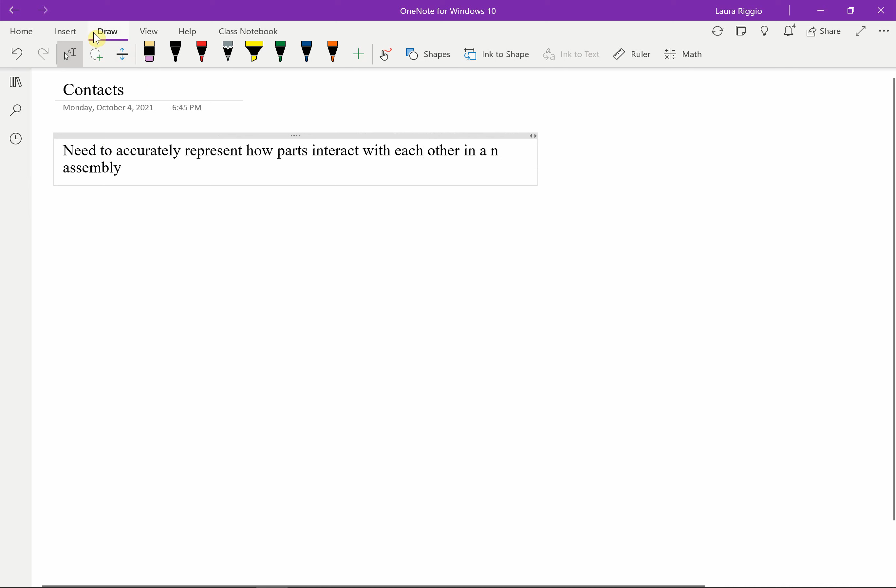In this lecture, we're going to go over contacts in SOLIDWORKS and how to define and describe them. Why do we care about contacts? We care about them because we need to accurately represent how parts interact with each other in an assembly. So basically everything that we've done up until this point has been on a single component. When you have assemblies of multiple components, we have to worry about how to treat the contacts between the two parts, and that's where contacts come in.

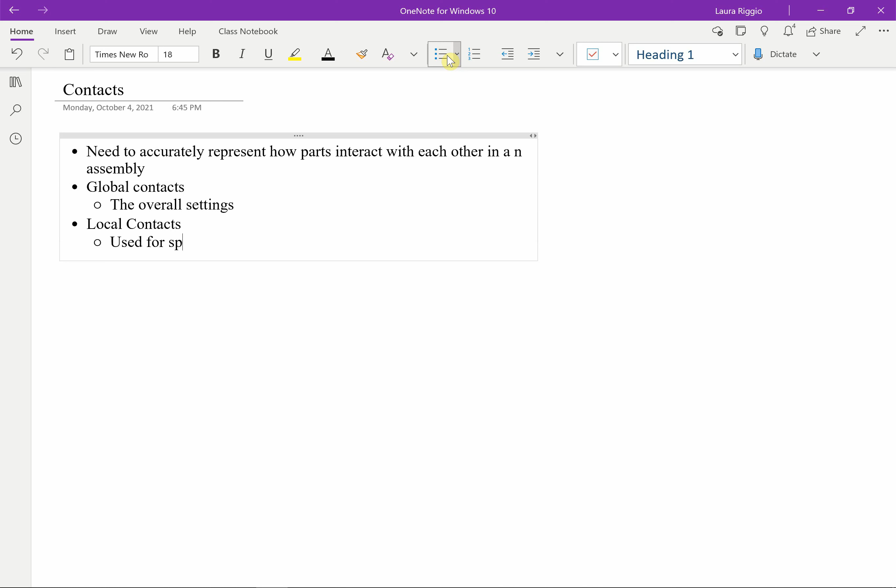So you have your global contacts, which are your overall settings, and then you have your local contacts, which are used for specific contact interactions.

There are 3 types, but we're really only going to deal with 2, and then we'll learn about a third one later. So the 3 types are bonded, no penetration, and allow penetration.

For bonded, if things are bonded, the surfaces act as if they are rigidly locked together, and you have a compatible mesh, and you merge your nodes.

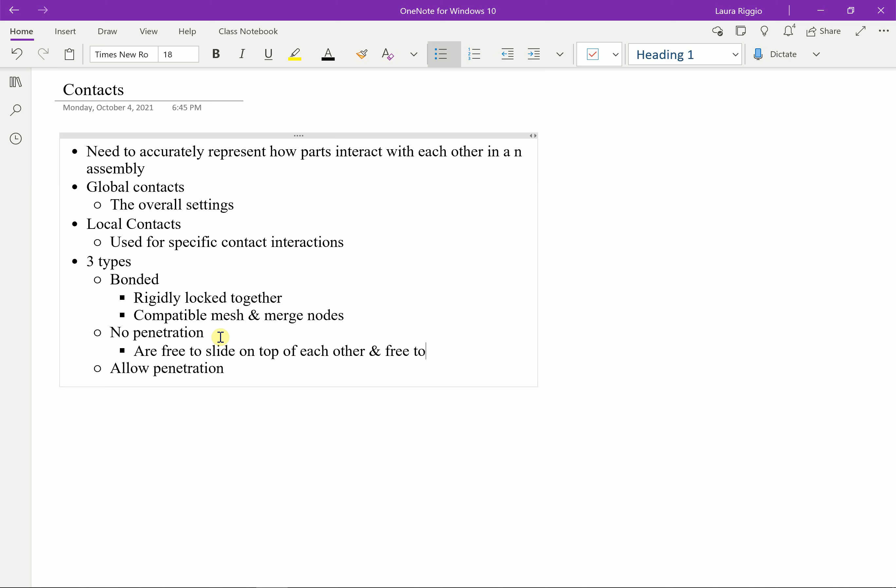For no penetration, what happens is your 2 faces are free to slide on top of each other, and they're free to separate. So bonded can't separate. They cannot go through each other, so you can't pass through each other.

There's also allow penetration. You have shrink fit, shrink fit for interfering components. We're gonna do shrink fit next week, actually. Maybe might be in a few weeks, but we're gonna do shrink fits.

One last thing to note is SOLIDWORKS sets your contacts based on surfaces that are touching, so small gaps can cause issues. So like when you're drawing your CAD model to allow for tolerances, if those 2 faces aren't touching, SOLIDWORKS isn't going to automatically find that as a contact, and then if a force is applied to one body, it's not going to transfer to the second body. So you really have to be careful when you model assemblies to make sure all of your contacts are accurately being portrayed.

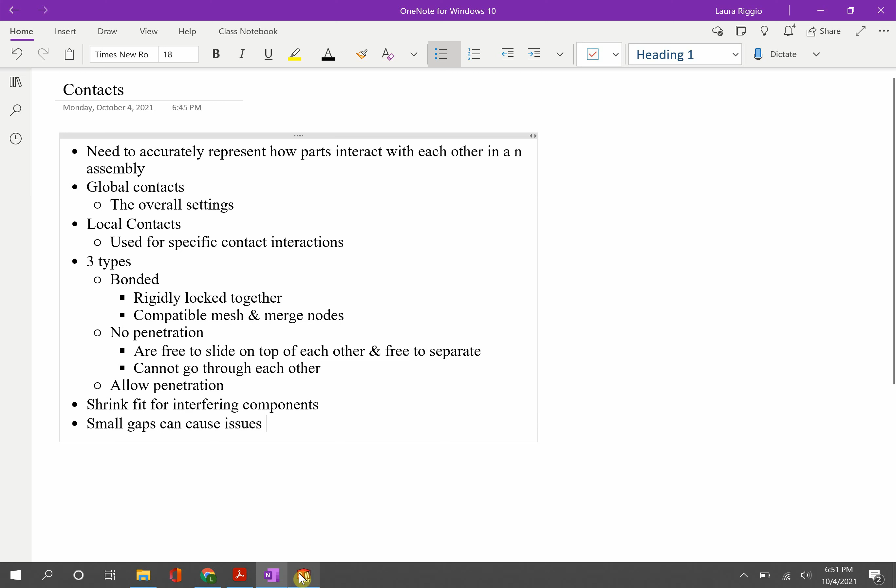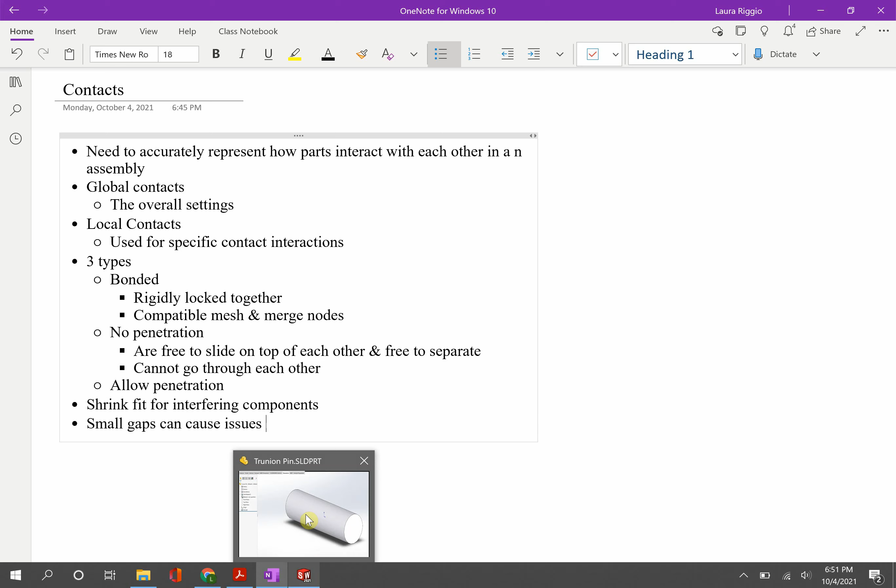So we're going to make an assembly today of a trunnion pin. That's a bracket with a pin in it. The first thing we're going to do is create some split lines on this part and then prep it for being modeled. A lot of the models we've worked with previously, this has been done already, but we're going to set this up.

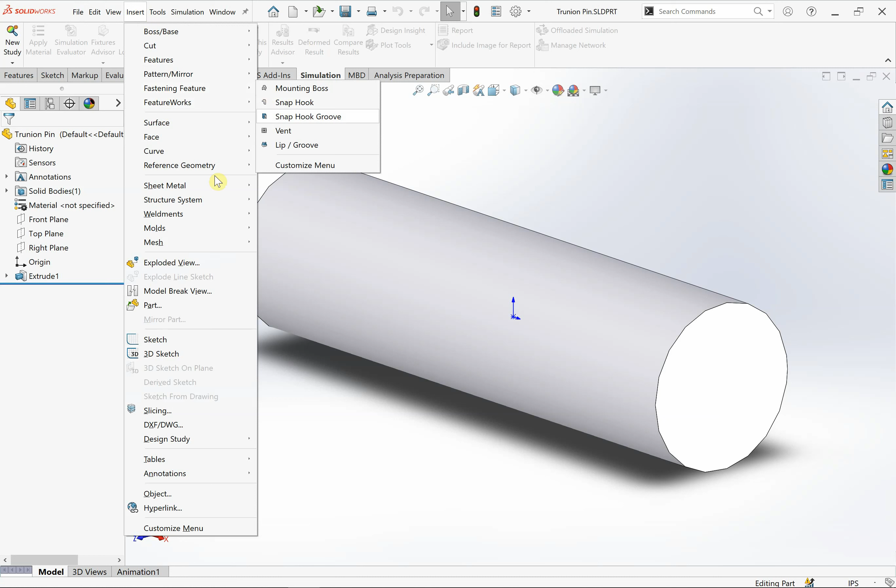So based on the part that we are looking at, I need to put 2 split lines in. So I'm going to insert some reference geometry, insert some planes. I'm going to use the right plane as my reference. I know that I need it to be 0.75 inches, and then conveniently we need a second one that is 0.75 inches from the first one. So I can increase my number of planes to 2, and that will create 2 equally spaced planes.

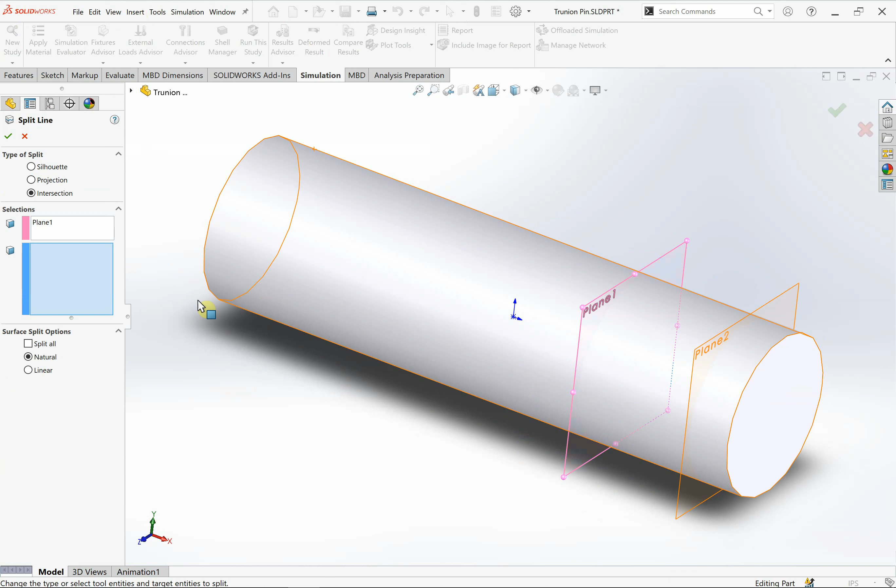So now I have these 2 planes roughly where I need them. I'm going to insert my curve for a split line, using the plane and the face, and I'm going to make it an intersection. Then I'm going to select both planes to do it at the same time. So what this does is it allows us to isolate this face that we're going to be using for mating and applying forces to, because we're going to apply the forces over here, not over here.

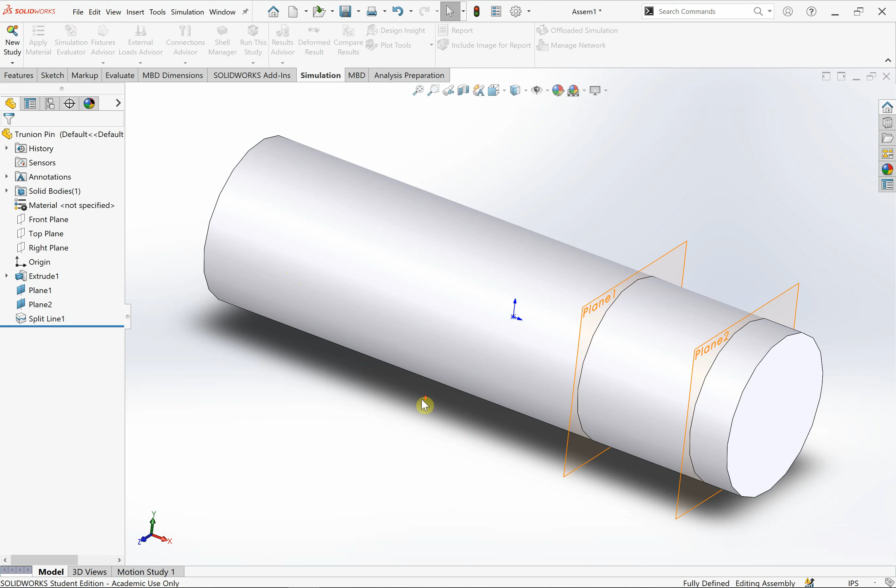So I'm going to save this, and then we're going to create an assembly. I'm going to create an assembly from part, using this part as the basis of my assembly. There it goes. So over here, SOLIDWORKS is going to show you any parts that you have open, so I can just plop it in.

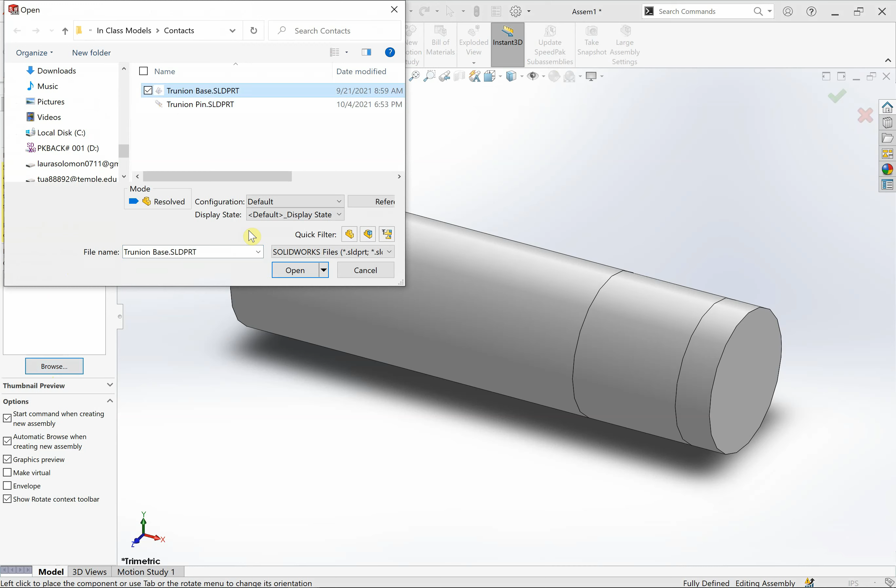Then I'm going to insert a component. I want to use an existing part or assembly, and this is only going to show me the parts that I have open, so I'm going to browse and find the base. I'm going to open the base and plop it over here. So you notice I can move this base around. I can't move this pin around because the first object you put into an assembly becomes fixed.

So we're going to put some mates in. We're going to make a concentric mate between the cylindrical faces. You can use any cylindrical face, so you can click up here for mate.

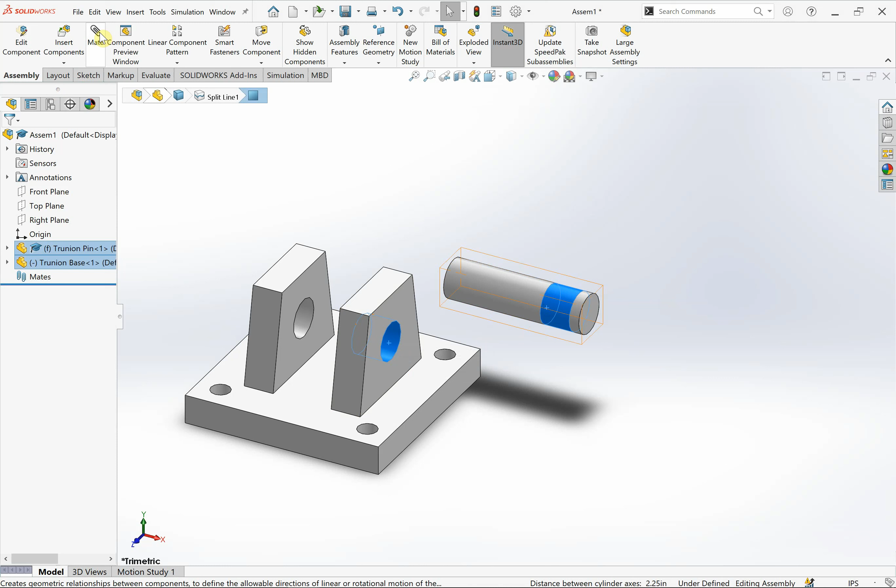SOLIDWORKS likes to guess which kind of mate you wanted. Since I selected two circular faces, it wants to make a concentric mate, which is what I want. So now this base can slide along the pin. It can rotate, but it has to remain concentric with the pin.

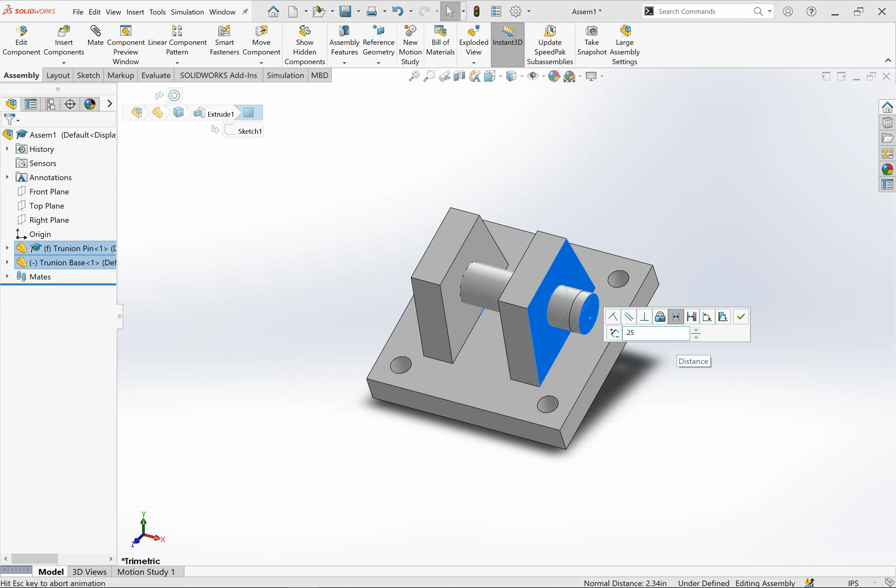The next thing I want to do is use this right face and this end face, and this is where some mates pop up. I want to use a distance mate, and that distance is 0.25 inches. I need a 0.25 inch gap on my base. And now see that the base can rotate around this pin because the pin was the first component added to this.

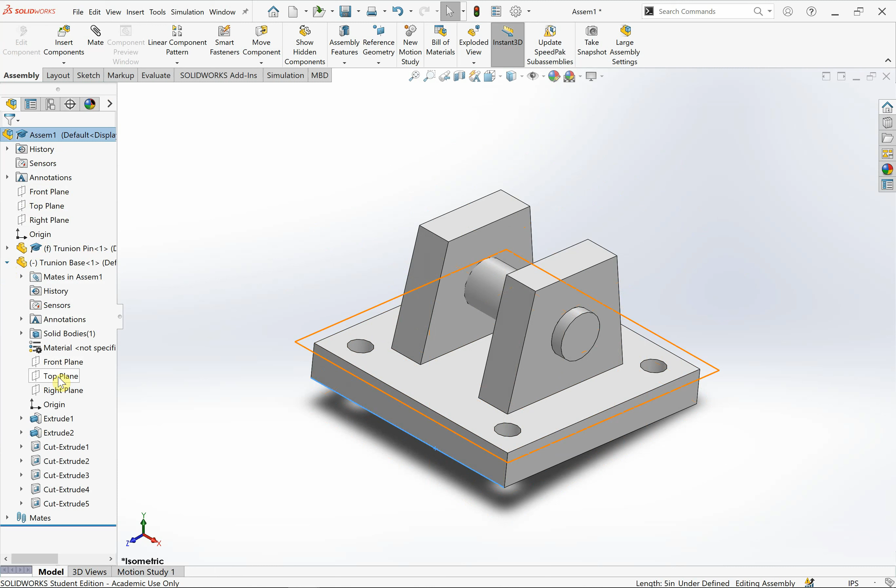So I'm going to add one more. Since our assembly has a front, top, and right plane, each part also has a front, top, and right plane. So I'm actually going to make the two top planes parallel, and that'll just make sure everything lines up nicely.

I'm also going to use this front plane, so I'm going to rotate the view for the front plane. And on the front plane of the assembly, which is up here, not the front plane of the parts, I am going to make a sketch.

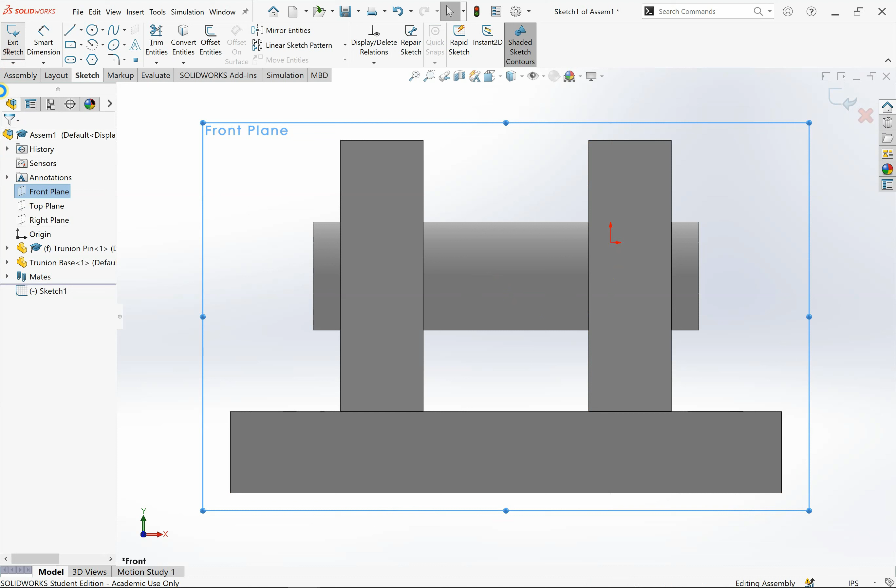And I'm going to draw a line. And you need to be very careful. Hold on, I want to exit the sketch. I want to do one more thing. So if here's my origin, just over here randomly.

I'm actually going to float my pin, so now I can just move everything. I'm going to take the origin of the pin and the origin of my assembly and make them coincident to line up the planes and to line up our components in our assembly.

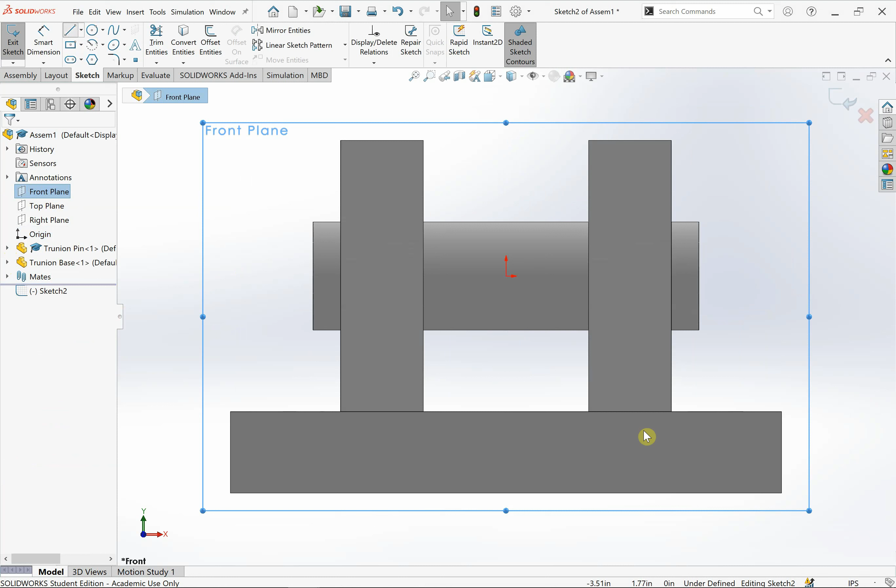Now I'm going to put a sketch on the assembly, and I want to draw a line, and I want to use the origin of the part to draw a vertical line. That's all I'm going to do is draw a vertical line.

Because I want to use this vertical line to make an extruded cut.

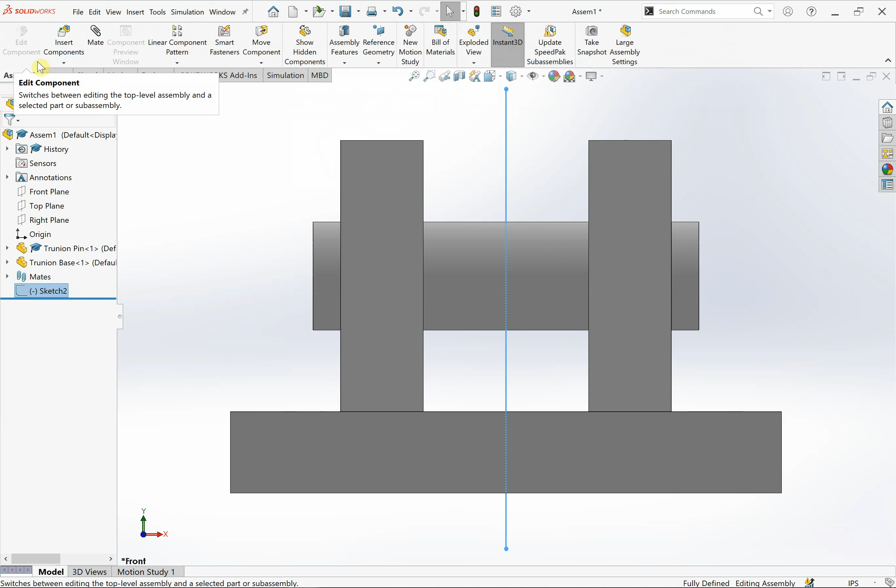Which is going to be under assembly features. We are going to make an extruded cut. You can see it's showing different arrows that we can use from the extruded cut. We're going to go from this sketch plane, through all. You're going to see this plane shows up, so we can go in different directions.

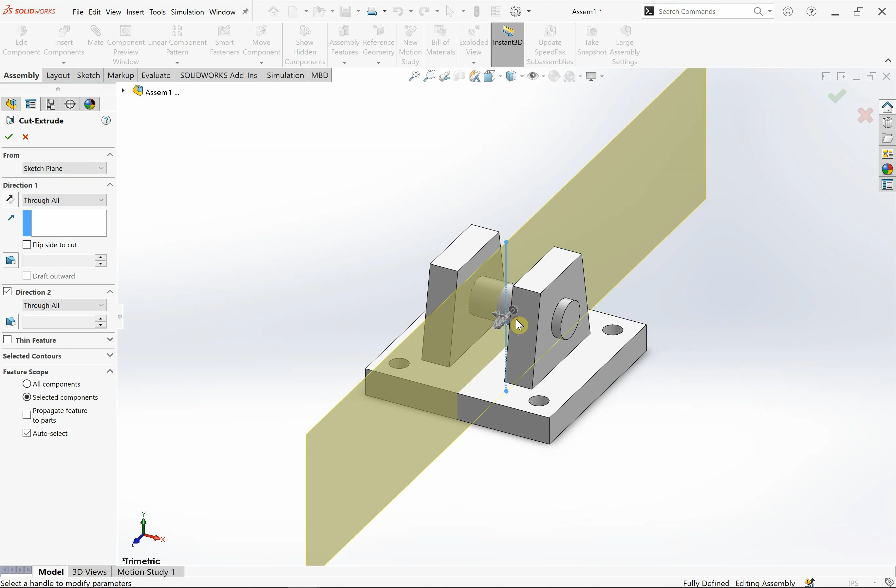Now, we put the split line on the right half, so we want to make sure the left half disappears. We want to make sure that arrow is pointing the way we need it to disappear. And we're going to just select our through all option.

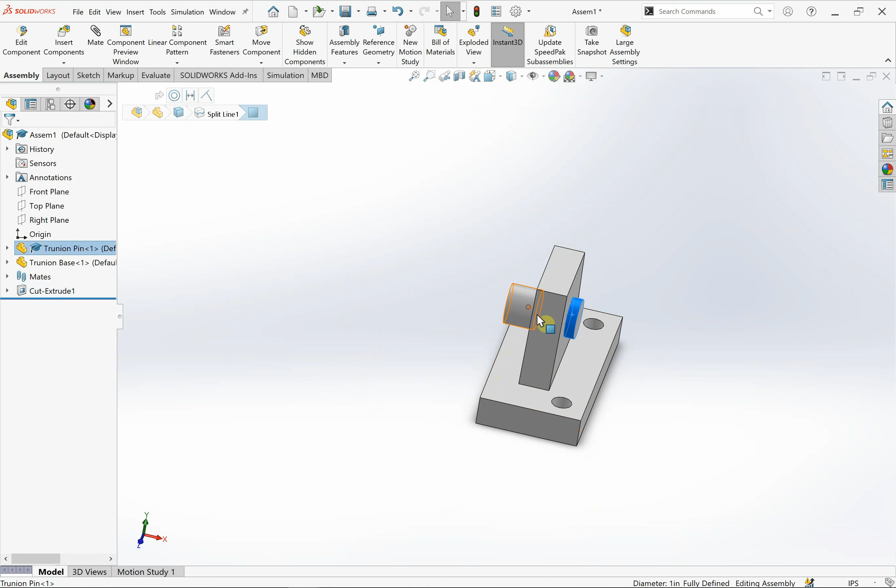And we'll cut away half of our model. Let me make sure we cut away the right half. If I have a separate face on the outside and on the inside of our cut model.

So we're using symmetry to reduce the overall size of our model so we can make it run faster, because anytime you have contacts, your models are going to take longer to run because it has to calculate what's going on here. So I'm actually going to save this, just so nothing bad happens.

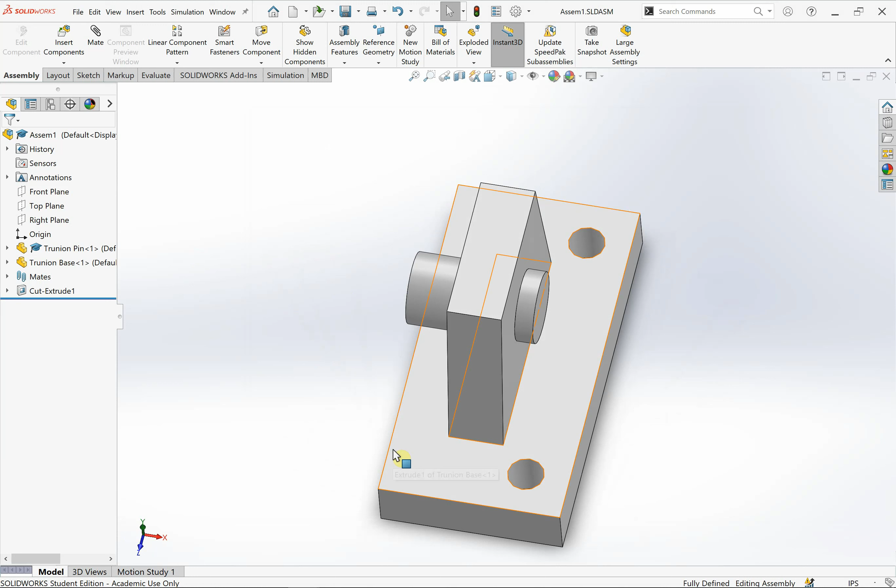So now we've done all of this work to get our model ready for the actual simulation that we are going to run. So now I'm going to go to simulation. I'm going to make my new study. We're still doing static studies.

And now I'm ready to work my way down my feature tree. I'm going to right click on parts and apply a material to all. The material I'm going to apply is cast alloy steel. So now my parts have been defined.

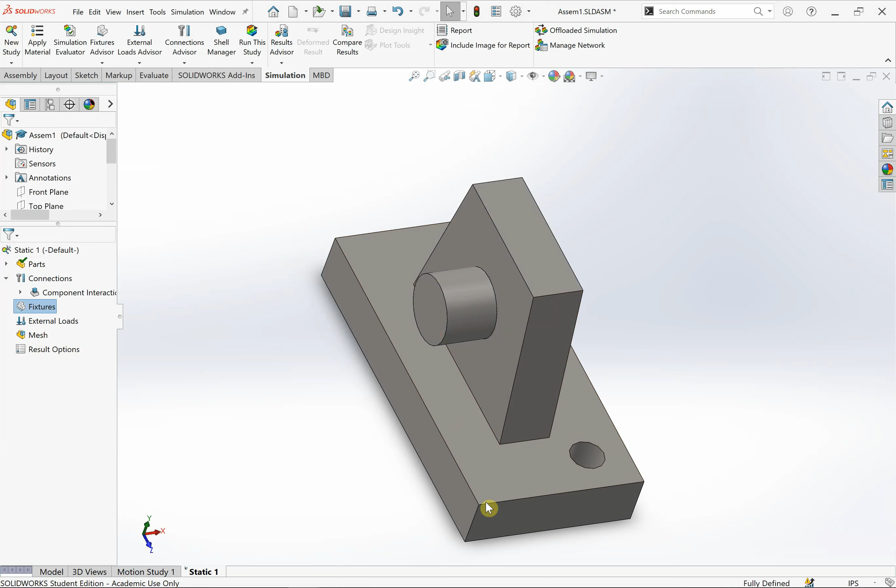I am going to put a fixed geometry on the inside face of our bolt holes.

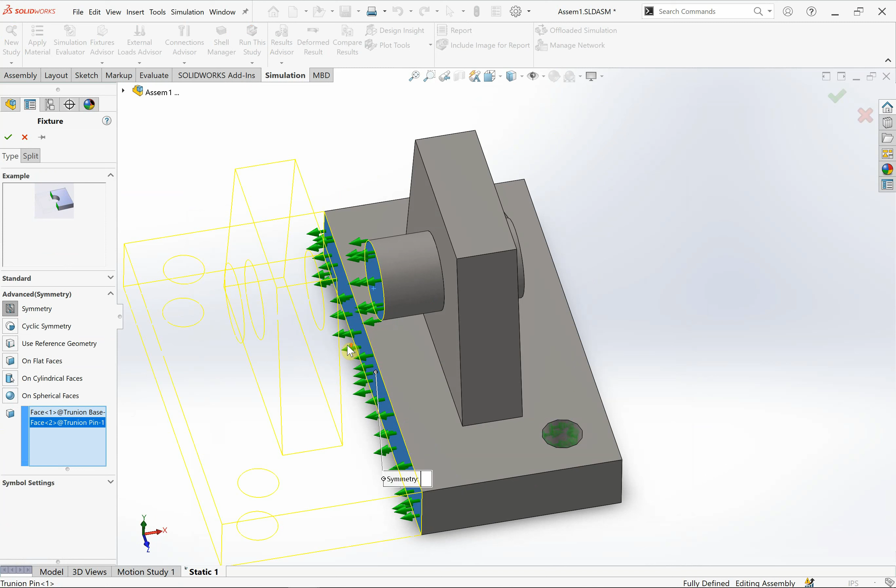And then I'm actually going to use an advanced fixture called symmetry on all of the cut faces, and as you can see, it's making a projected part show up in yellow. So now we have symmetry, and we have fixtures, and notice the symmetry is showing translation arrows normal to the plane, because if there was a part there, that side can't move normal to the plane.

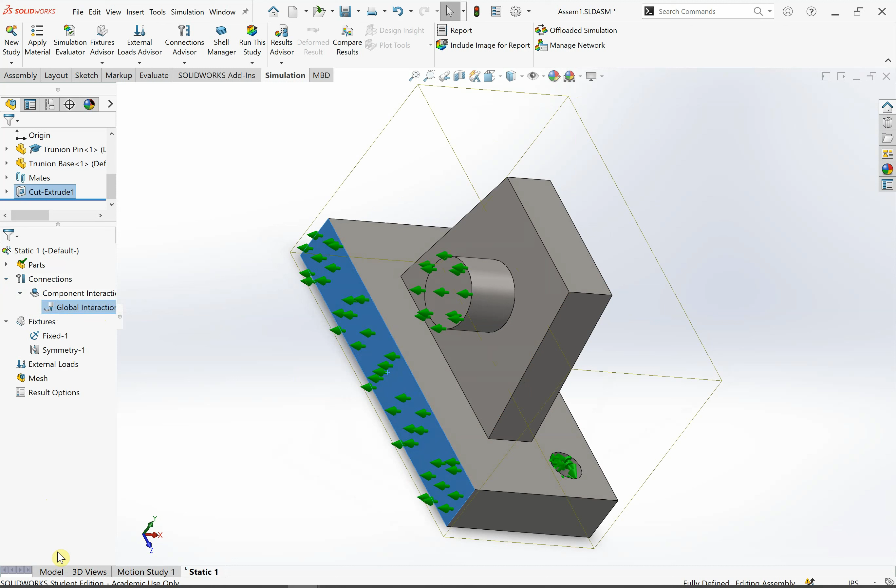Next we're going to do the contact. If you expand these contacts here, we have a global bonded contact. What we're going to do is put a local contact which will override the global contact between this pin and this base. The easiest way to do that is if we go back to our 3D model and click on...

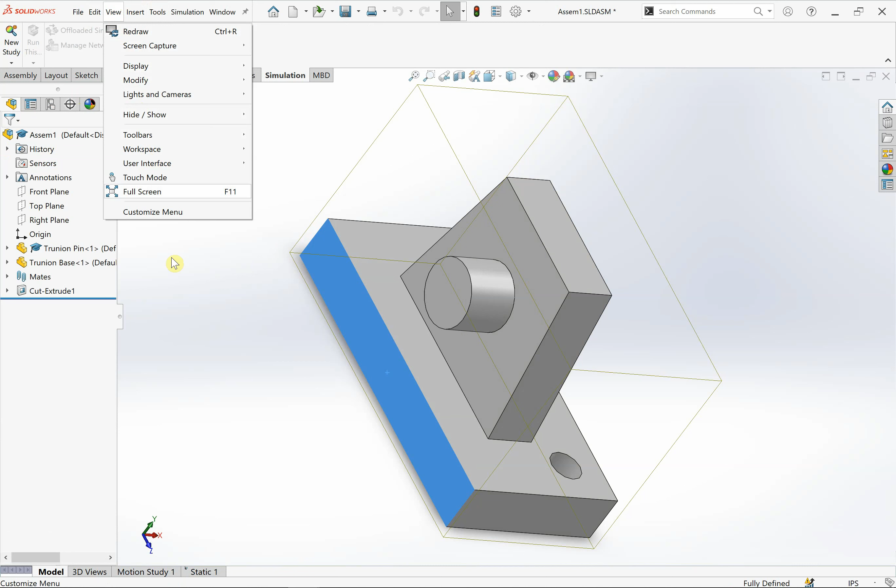Configurations, not configurations. I'm going to click on view. Oh, I forget how to make an exploded view. I'm gonna click on exploded view. There it is, thank you.

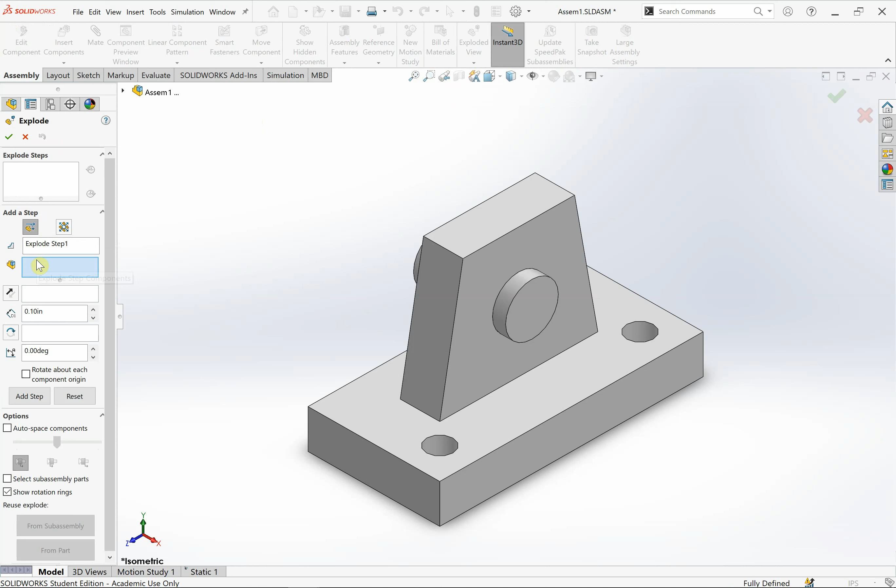We're gonna do a regular step for our components. We're just gonna push the pin that way. So now we have an exploded view.

I'm going to go back to my static study. I'm going to right click on connections, and I am going to create a local interaction. Instead of manually detecting it, I'm going to set it to contact. Contact is going to make a no penetration type boundary between them.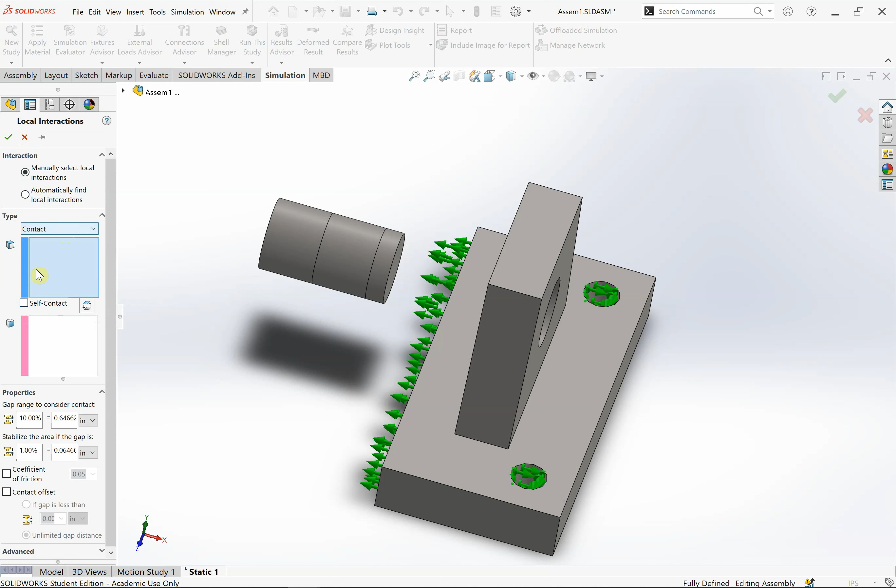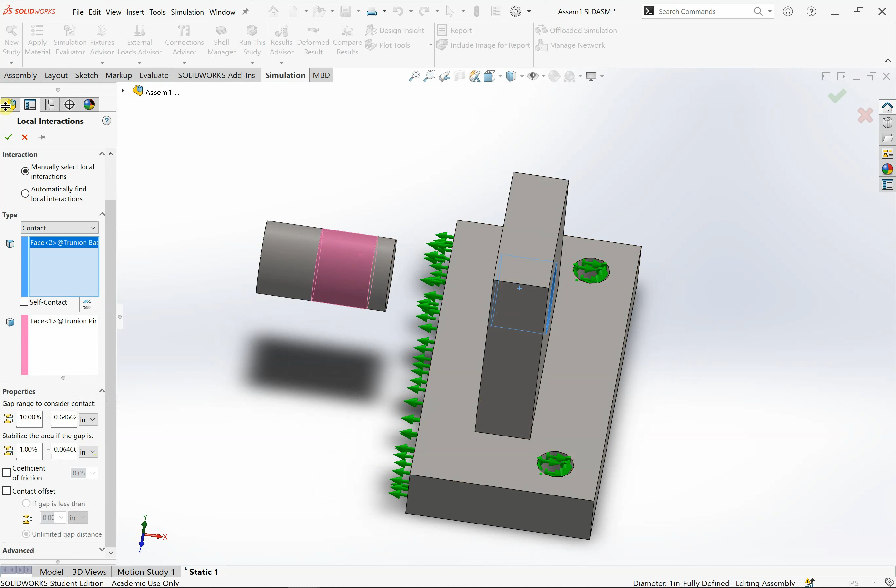The first surface I want to choose is the inside face there first. The second face will be the face on the pin. I'm going to click my check mark. So now here we have our global that's bonded, and we have our local that's overriding it.

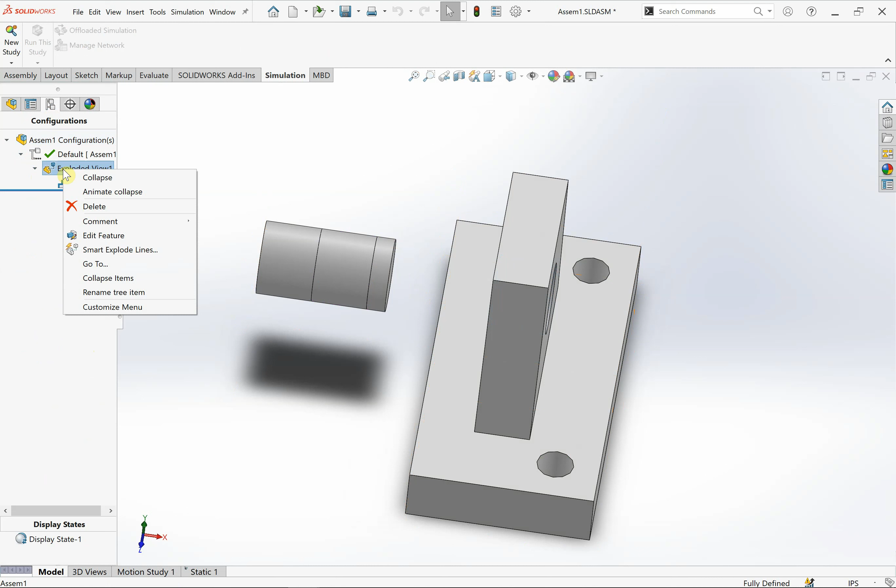I'm going to go back to my feature tree, and I am going to collapse my exploded view and go back to my simulation. We have our symmetry, we have our fixtures. We're going to put our load on.

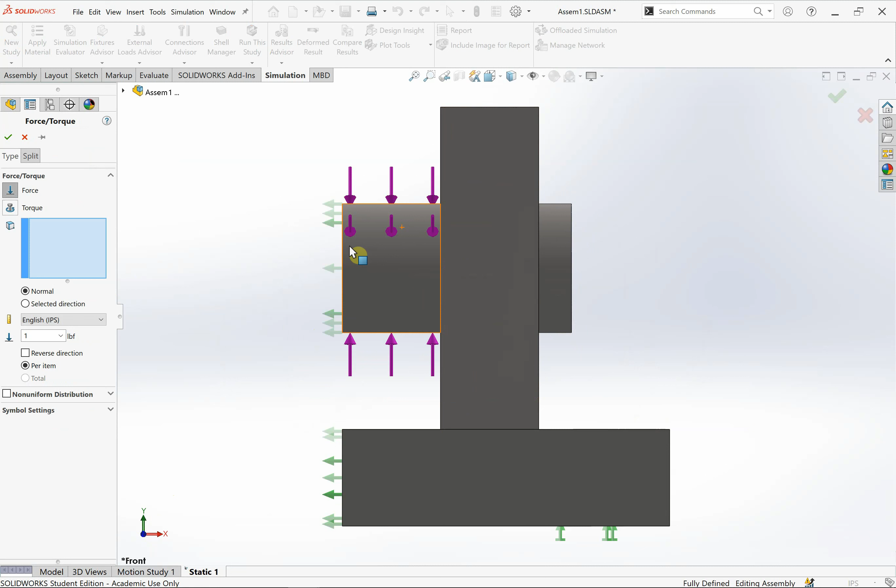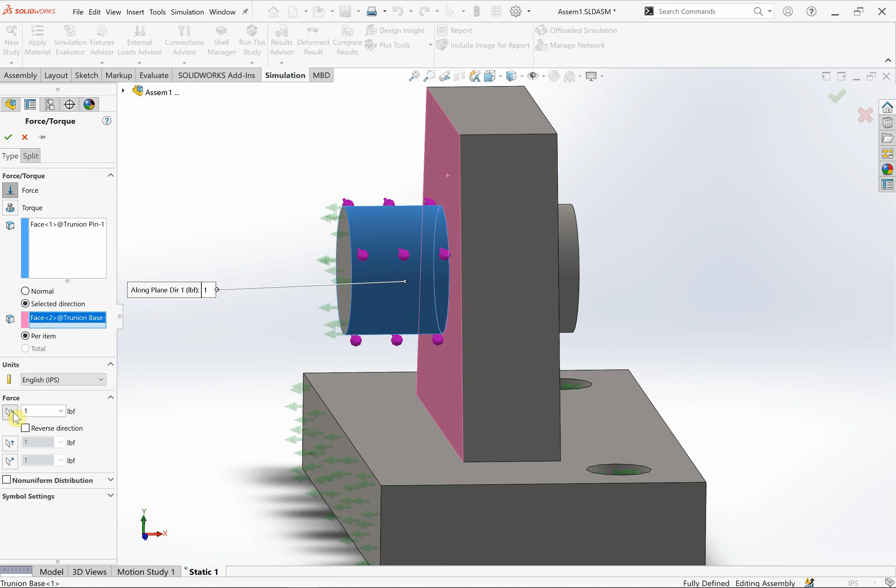So this pin experienced a force that, if we're looking at this, goes at a 60-degree angle like this. So we are going to put a force on the circular pin surface, but we don't want it to be normal. We're going to select a direction, and we're going to use any flat face. I'm going to use this inside face, and we need to note our directions here. We want a horizontal going this way and a vertical going that way.

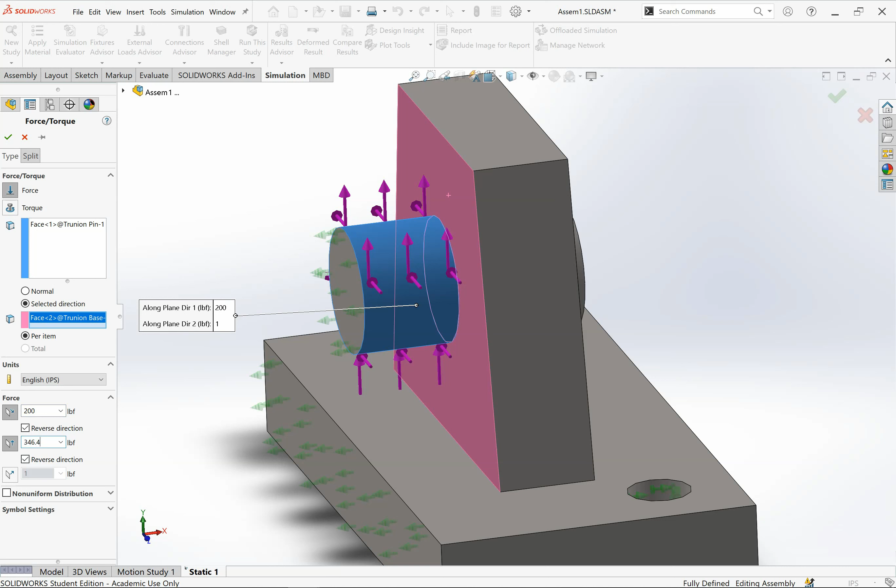And these values are 200 and 346.4. So this was subject to an 800-pound load, but since we're only looking at half the model, we're going to use a 400-pound load, which I broke down into its two components. So now we have our vertical and horizontal components. It's important that the normal component—anything normal to this face—is not a force that we want. And remember, these directions are in reference to this face that I chose.

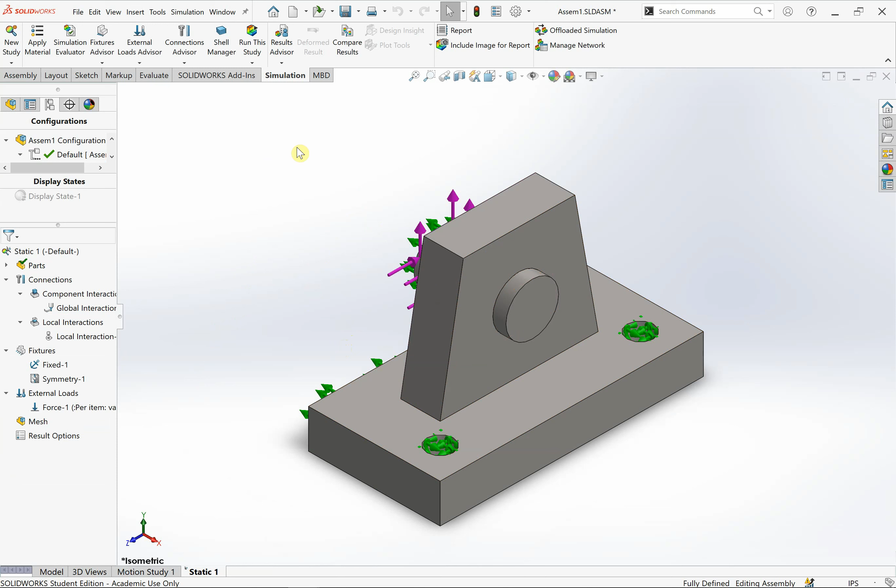So now that we have our fixtures and our loads, we're going to run a standard mesh. It's going to take a little bit of time because it's got to resolve the contacts. You can't mesh it until after you've made your contacts. And you see here it's establishing this matrix, and then it iterated on it. And now it's solving the contact constraints. This is where it's going to spend a lot of time, because where bonded merges the nodes in contacting areas, no penetration doesn't. So it takes a lot of computational power and effort to solve these contact regions. The more you have, the longer things are going to take.

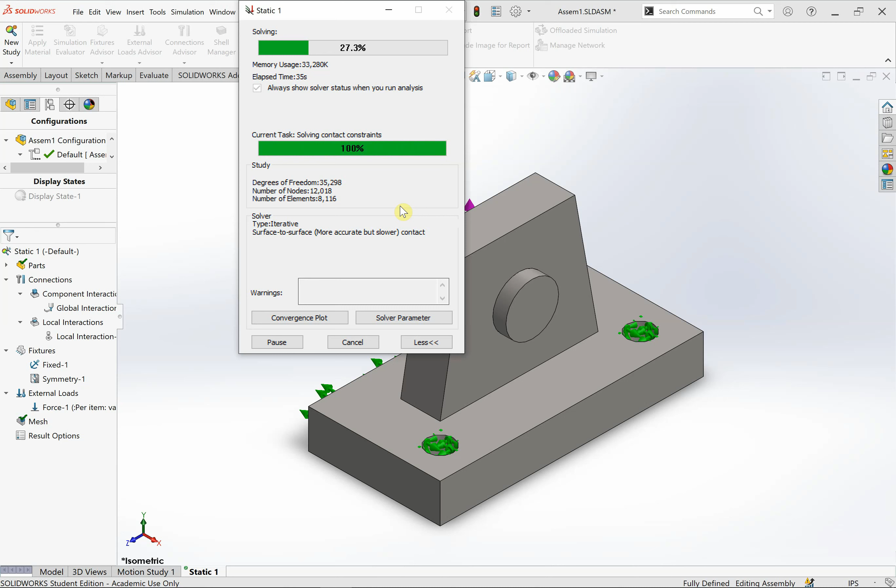And it pops out our results. We have our von Mises plot.

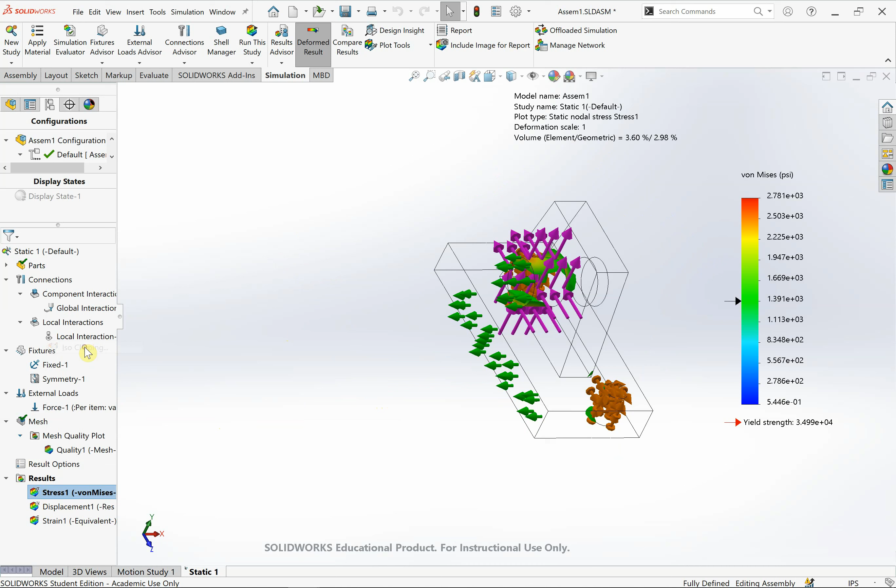Before we look at a graph of contact pressure, we're going to look at the von Mises plot a little bit more. I'll show you how to edit some views on it. If I right click on my von Mises plot, I can make what's called an ISO clipping. First I'm going to hide the forces and fixtures because there's junk in my graph. I can use an ISO clipping.

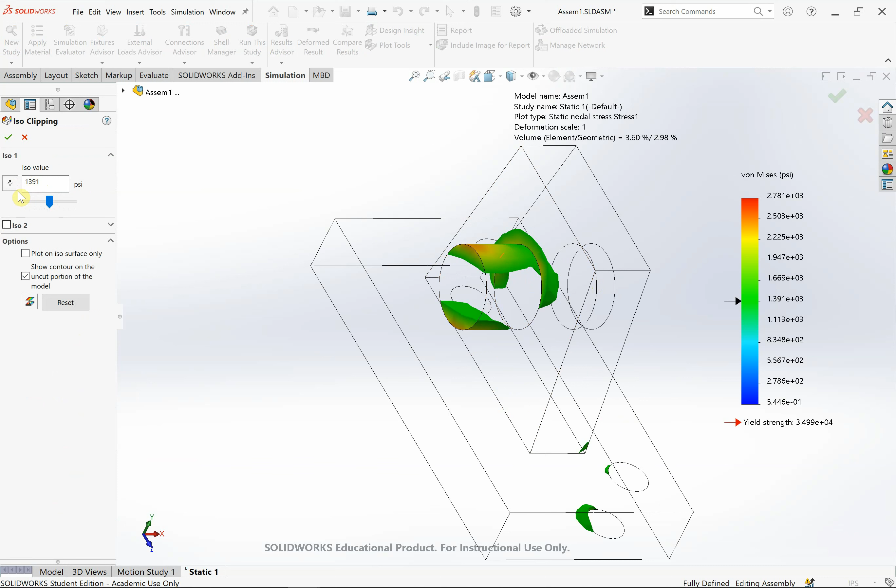What an ISO clipping does is only show you values in a certain range. So if you notice here, it's now showing values that are 1391. If I slide it to the left, lower stresses come in. If I slide it to the right, it's only going to show me higher stresses. You can flip this arrow so it works the other way, only showing you things lower than it.

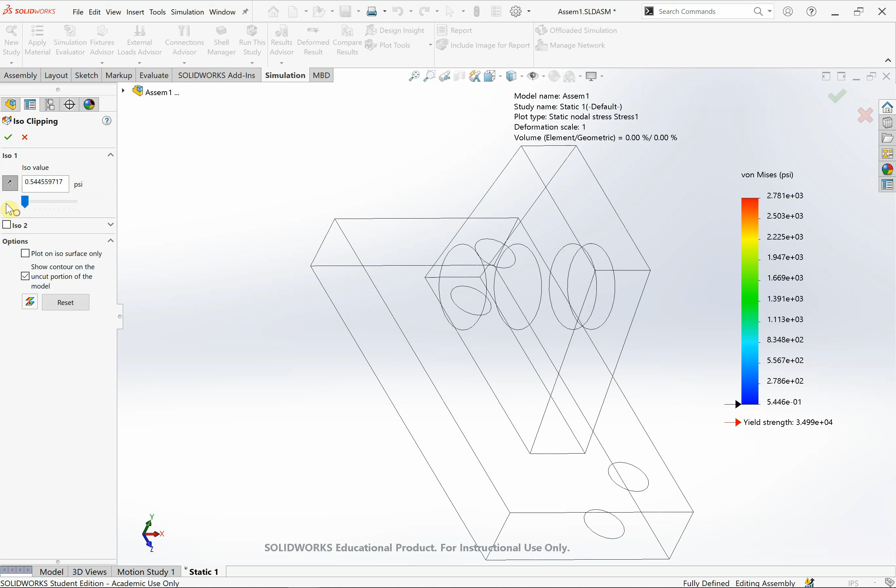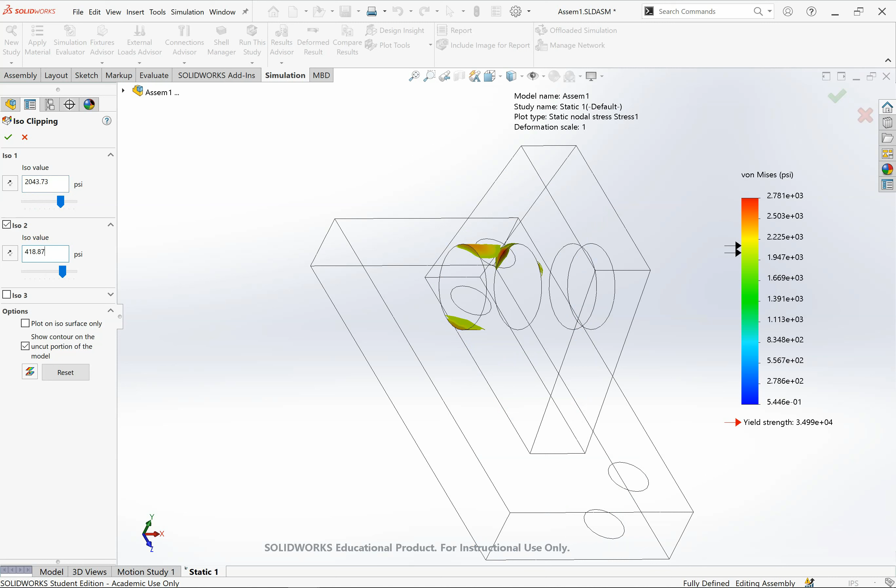We can put two on, so I can show you values between this and this. If I set this first number to, let's say, 2043.73, and I set the second number to 418.87, it's going to show you values between those. So it's really good for finding stress equal to a certain value, where the arrows will show you what you're looking at.

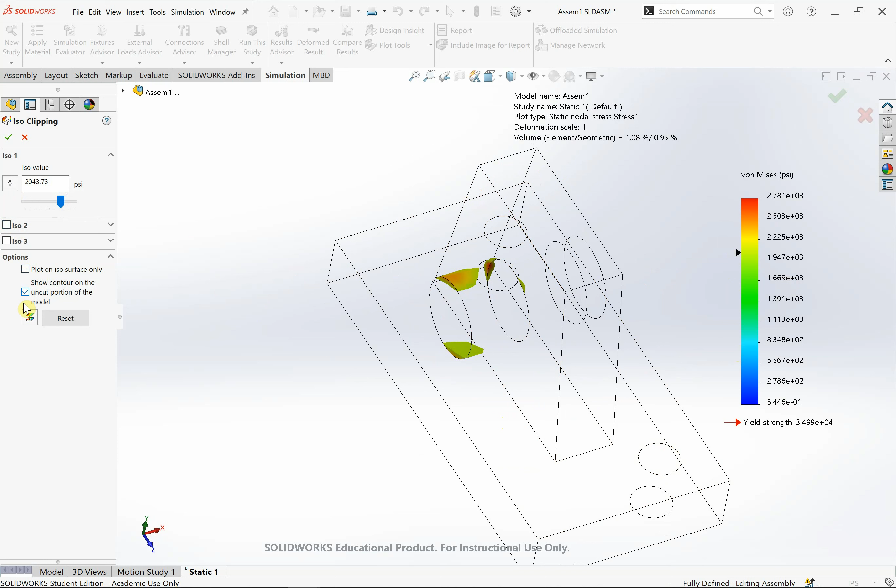So this is showing me values above 2043.73. If I say plot on isosurface only, you're going to only get that value. You're not going to get anything higher. I'm going to turn off the ISO clipping so it doesn't mess anything up.

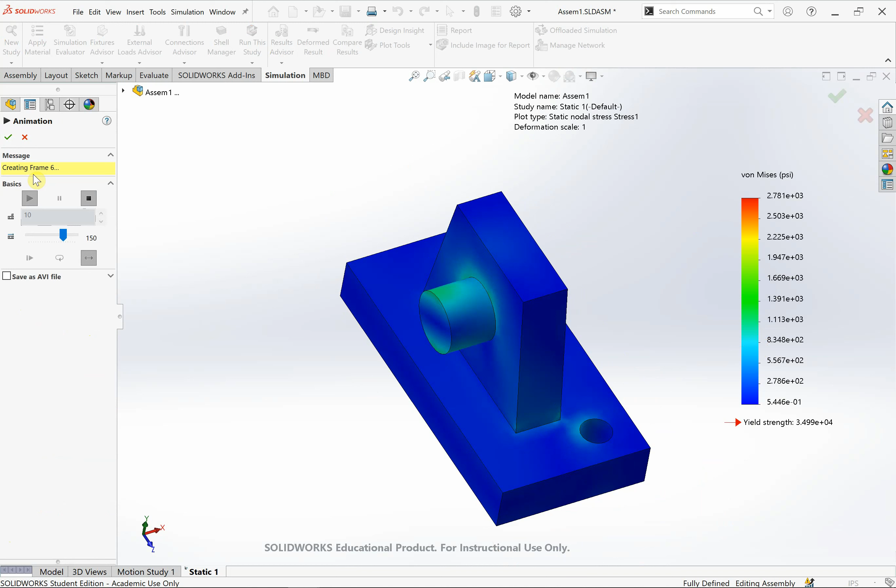As a reminder, we can animate our stress by right-clicking and hitting animate. We can change the number of frames, say 10, and then run it again. The more frames, the smoother a picture you'll get. Just fun things that happen. You can do the same kind of things with ISO clippings and animation to the displacement and strain plots.

We're going to create a new plot in this case to see what's going on with our contact. I'm going to create a new stress plot, and we're going to make a plot of contact pressure. Notice this only shows up because we have contacts occurring. We're going to show it as a vector plot.

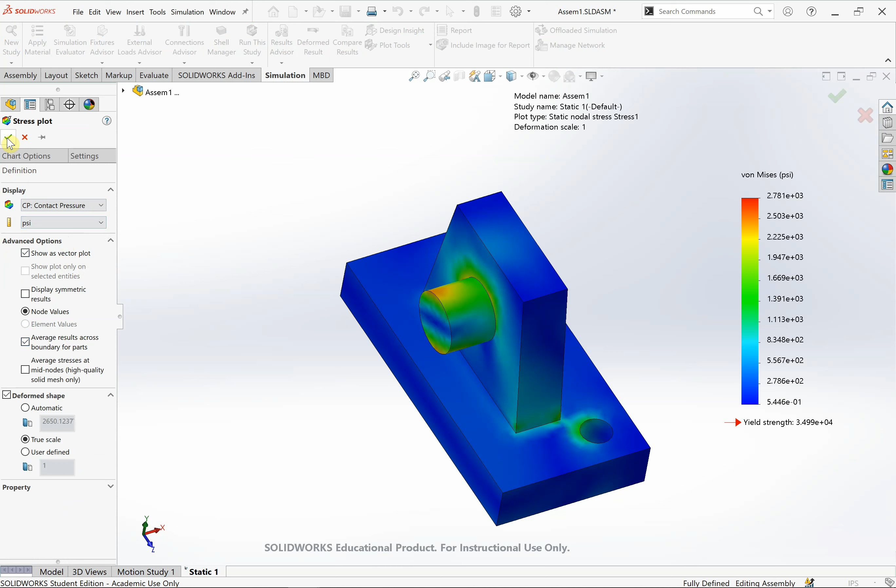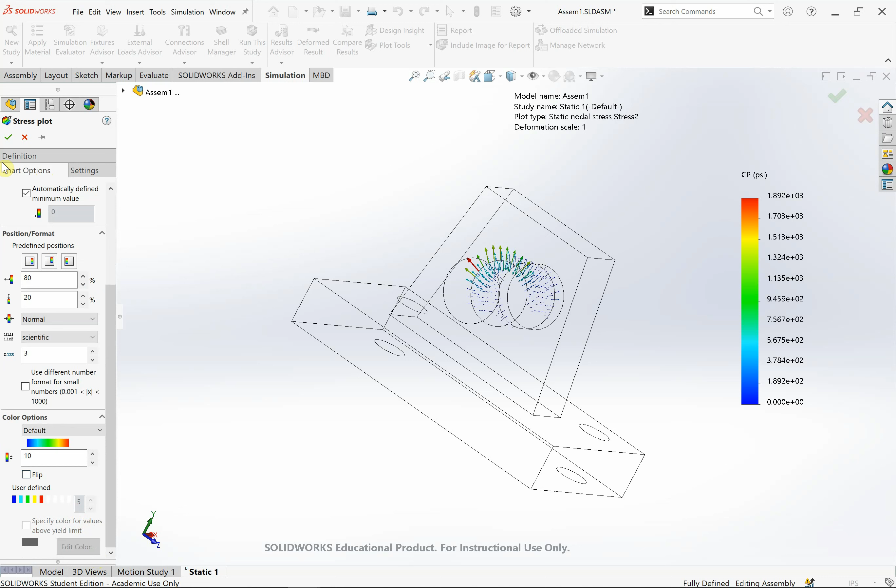We're going to look at it, and you're going to see these arrows show up. So we're going to actually edit its definition, find its symbol size, definition, show as vector plot. I can't find the setting right now of how to make the symbols larger.

What's unique about a contact pressure plot is it's showing us the magnitude and direction of our contact pressure. You can see it's higher where we applied our forces and our load, and it's lower where it's not.

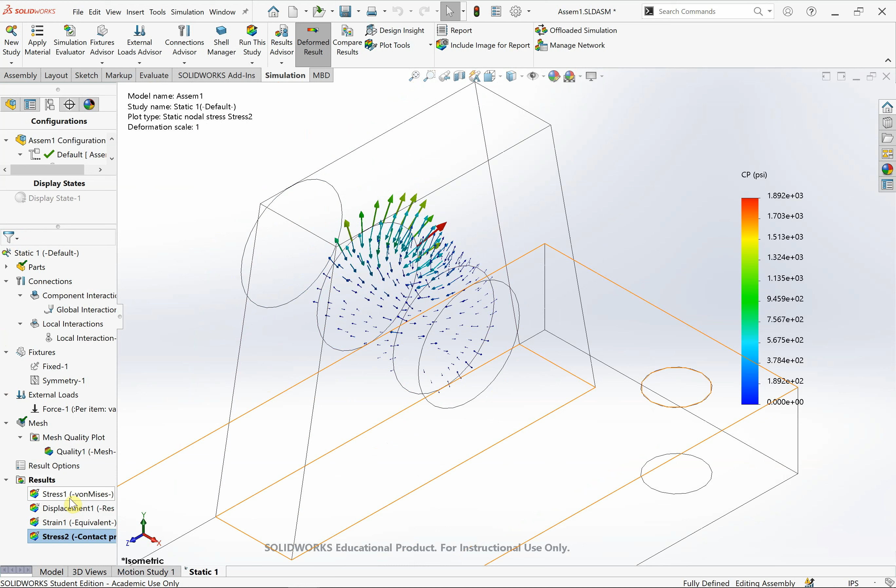That's how you can look at some of your contact stresses. We're actually not going to go into verification with this. If we also look back at our von Mises plot...

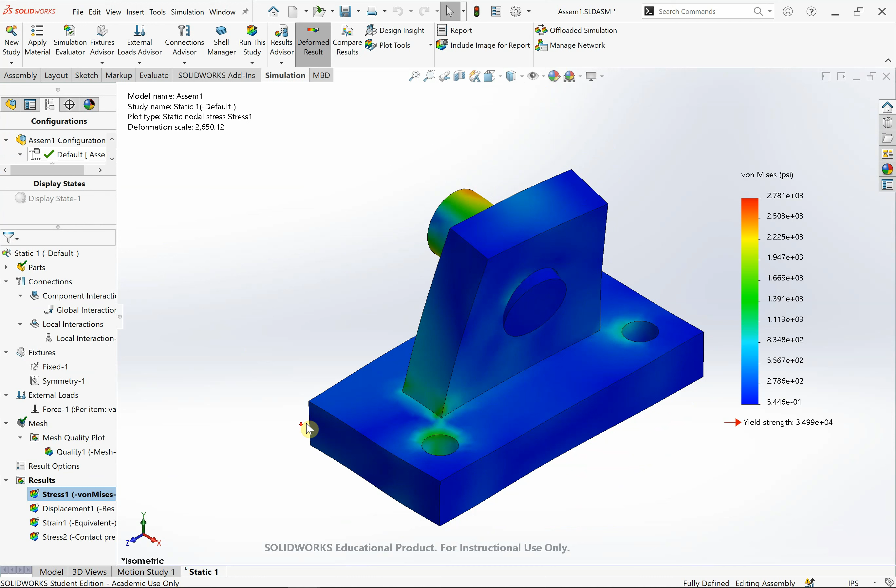I'm going to pose the question to you—I'll get a good view of it, this will work—of whether or not you think the way that this part is deforming, as I animate these, is an accurate representation. So you can pick your brain on that.

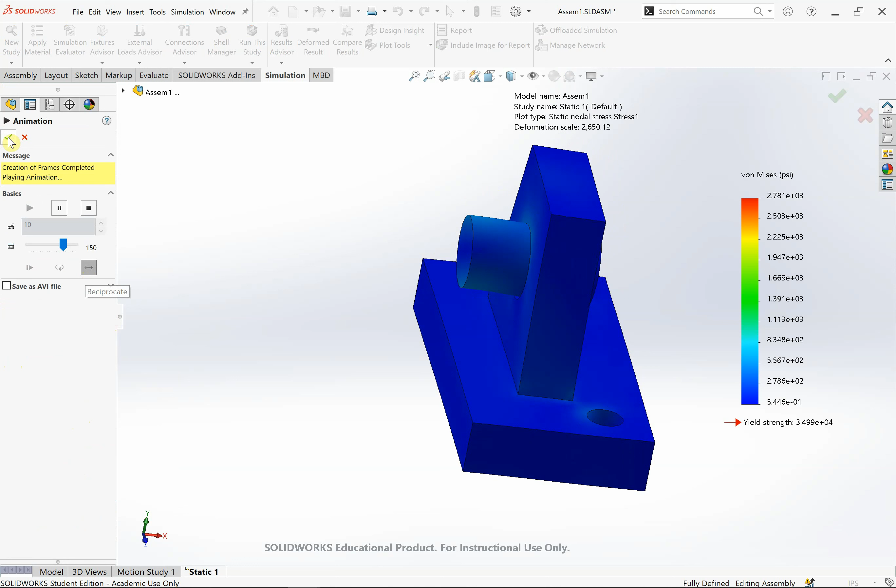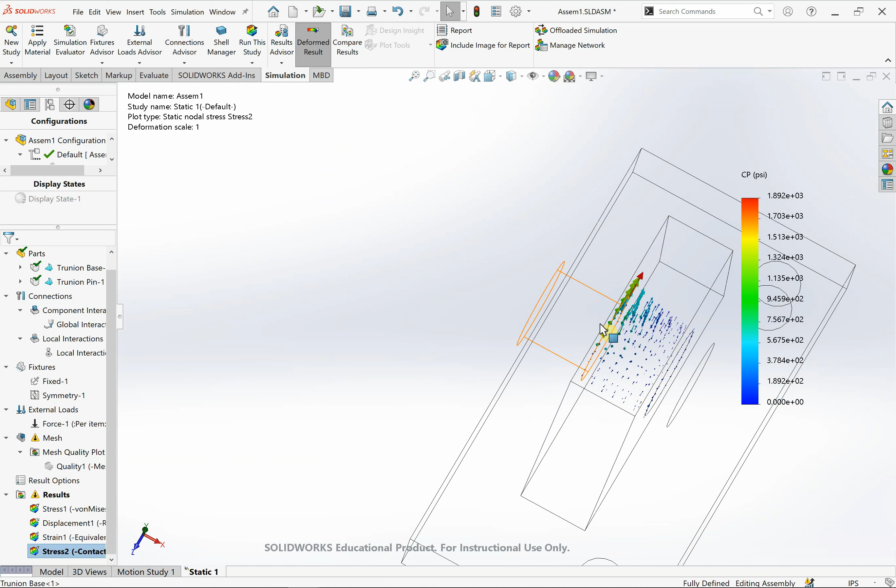But yes, this contact pressure plot is showing us the magnitude and direction of the contact pressure for our contact. We can rotate it around and again see how it's larger where we applied our force on the outside, and it's being pulled upwards with that 60-degree angle that was defined.

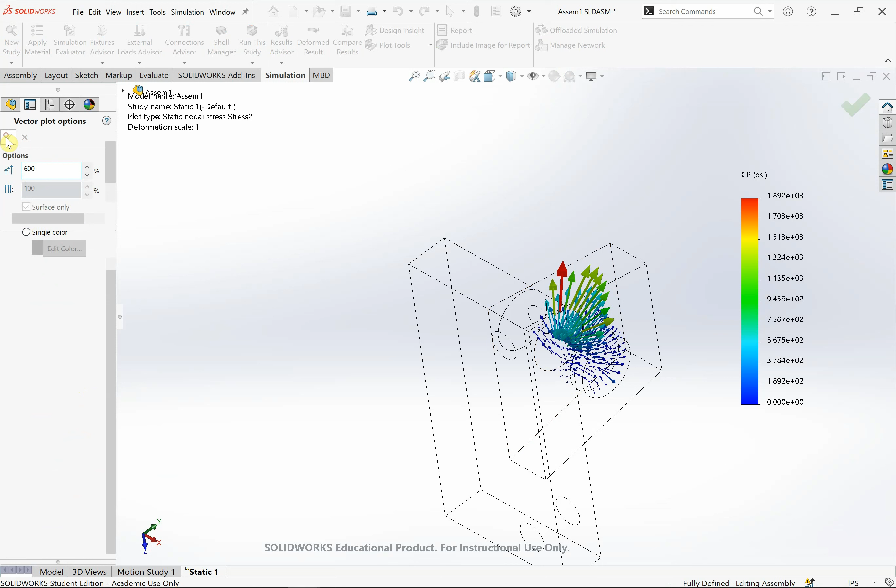Vector plot option, vector plot options. 600% is what we're going to make them. We're going to make sure it matches the color so we can actually see the pressure with our vectors. You can go up to 1,000, but there we go. Now we've got some arrows we can see.

So this is basically it for this—just a brief introduction into contacts. We're not calculating the contact pressure by hand; that's above the scope of this course for this example at least.

But what's important is to know we have global contacts and you can define local interactions, because when you're modeling an assembly, you have to make sure you're actually modeling the contact between components correctly. And this is also going to lead us into what we're going to do on Thursday, which is talk about bolts, and into our next project, which is all about bolts.